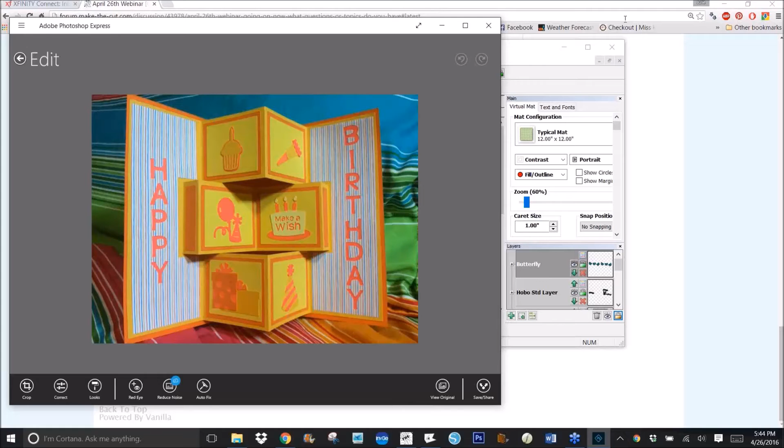Well, I saw this card. I really liked it this week, and when I saw it, I thought, oh, that's perfect for Pop-Up Card Studio. So I thought I'd show you how to do it. It's a quick, simple thing.

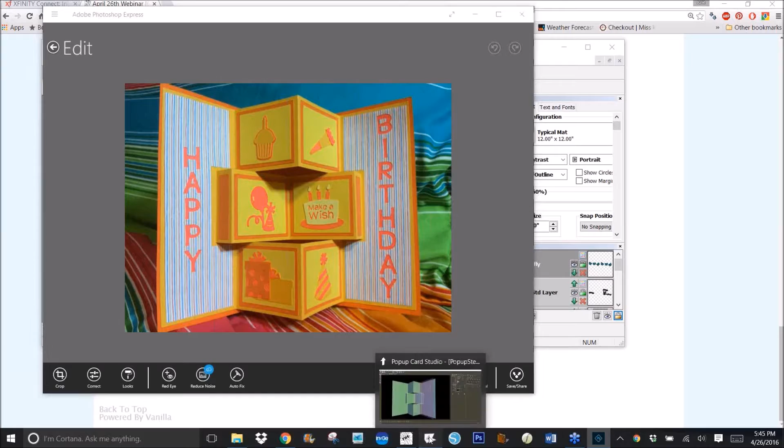It could be used as here. It's a happy birthday card, but it could also be used for any occasion. It could be a Mother's Day card, a graduate, special awards, or a thank you card for teachers, or whatever. And so I'm going to go to Pop-Up Card Studio and show you what it looks like there, and then I will go ahead and reconstruct this.

So I'm going to click on New in Pop-Up Card Studio, and I'm making the width of this 6 inches and the height 5 inches. So this is the width, 6 and 5 up. It will take a full 10-inch wide card to finish the project, but we enter in the dimensions of the face of the card in Pop-Up Card Studio.

So the first thing I want to do is add some squares. To find the squares, I click on the heart on the library, which opens, and then polygons, and I'll double click on square. Now I have to decide where I want it, because the default position is at 1 inch, and I know I don't want it at 1 inch.

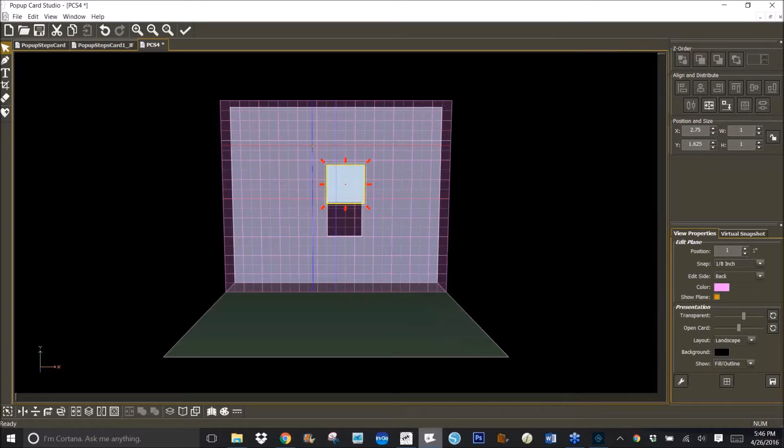So what I'm going to do is use Control X to cut that, and then I'm going to move this plane out to about 2 inches. I need this where it belongs. I'm going to put 2 inches in position. So that brings the plane out 2 inches from the back of the card.

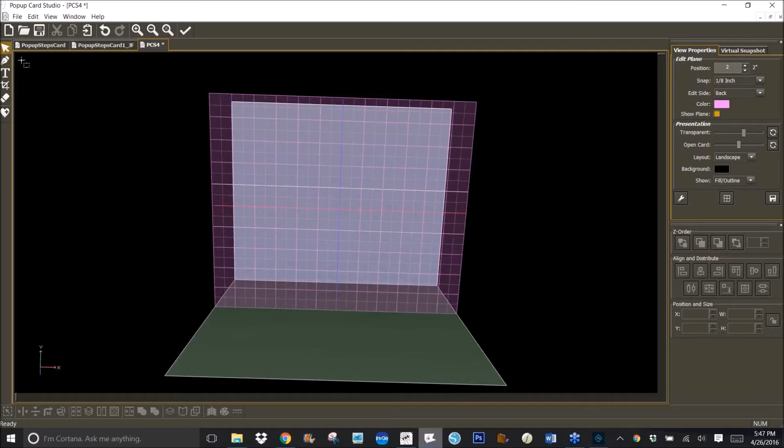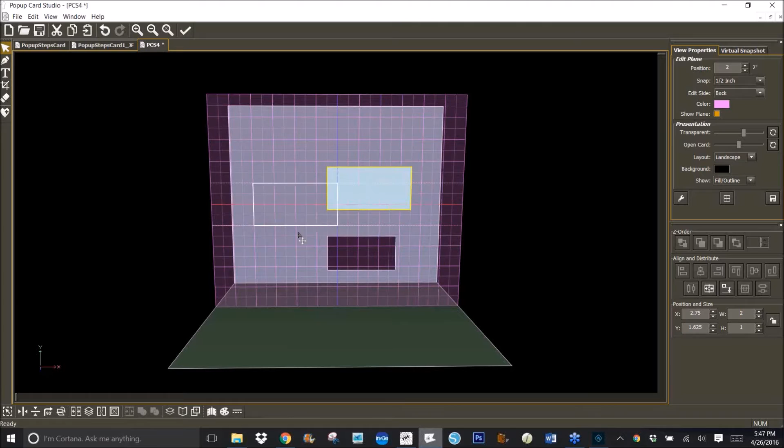And then I'm going to use Control V, after I click the arrow, Control V, to add that square back on. And I would like the snapping to be at 1/2 inch for this card. That'll help me place everything accurately. I want to resize that square to 2 inches wide, so type 2 and press Enter. And for the height, I want this to fold back, and I want the block to be 2 inches. So that means I need to make the height 4 inches.

And then press Enter. So I'm going to push it up here, and then use this down arrow to push it firmly against the bottom of the card. And I need another one just like it, so I use Control Shift and drag, and just drag off another. I'll move it up and push it down just to make sure that it's firm on the bottom.

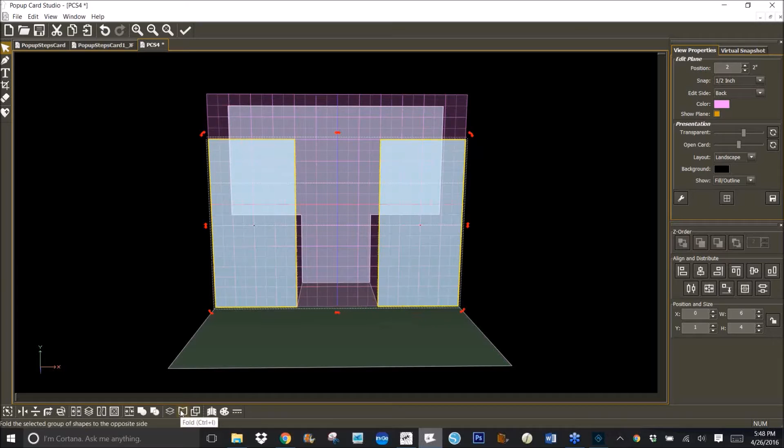Now the one that goes in the middle is shorter, but it's out 1/2 inch. So what I want to do is copy this one, Control C, copy, and before I leave this plane, I'm going to hold Shift and select both of these and click on this fold icon, or Control plus I, to fold them back. What that did was it folded them back to the back of the card. So that's what we have.

We really only have 3 pieces, well, 4 pieces to this card, so we've got half of it done already. Everybody should try this, because it is a lot of fun to play with, and I love pop-up cards because they have a wow factor.

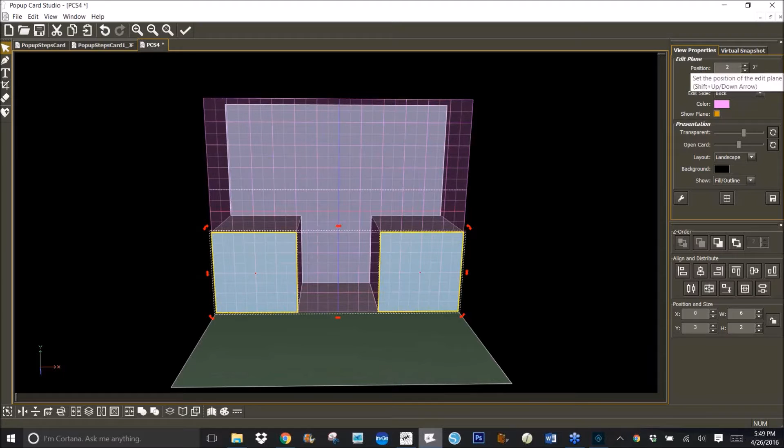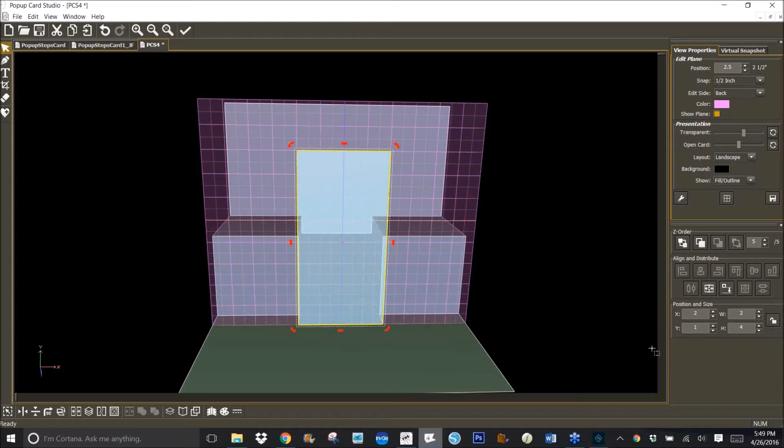For the next one, I need to have a position of 2.5. I'm going to move it forward just a little bit, as you see here. So it's going to stick out a little bit, and I'm going to use Control V to paste that same shape in, but I don't need it to be 4 inches tall. It's going to go back 2.5 inches, and then it has a leg here of 1/2 inch, so I need it to be 3 inches tall.

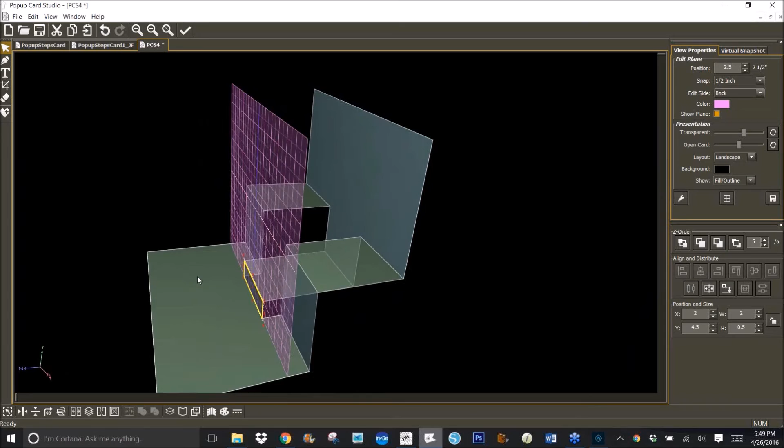Press Enter, and we'll slide it down to the bottom, and then we'll fold it back. And we want it to go all the way back and accept. So let's look and see how it is now. And we only have one more piece to add, but it's going to be added on the other side of the card. So to get there, I press the space bar.

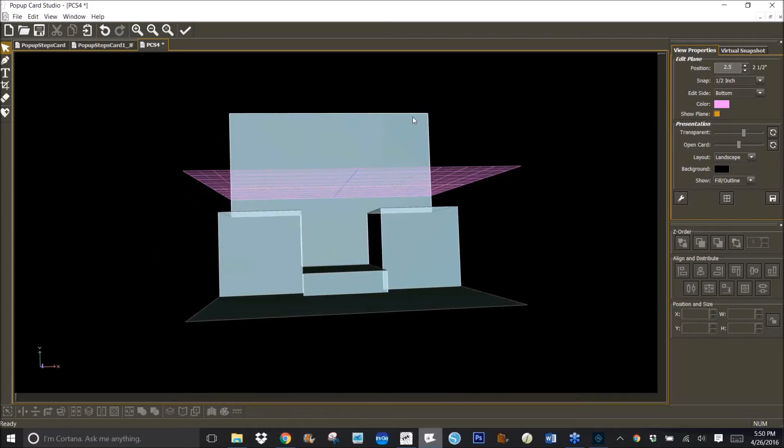And I'm going to put this up at a 2.5, I believe. Yeah. So that it's a 1/2 inch higher than these boxes. And I'm going to again use Control plus V and move it to the center. I'm going to pull it forward and then use that arrow to take it down to the bottom of the card.

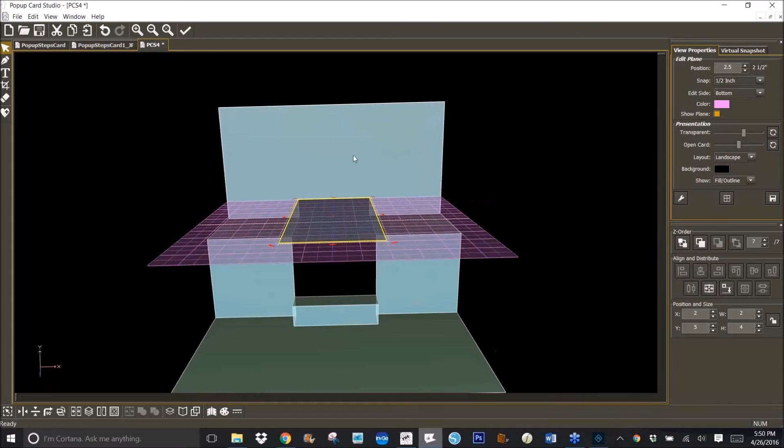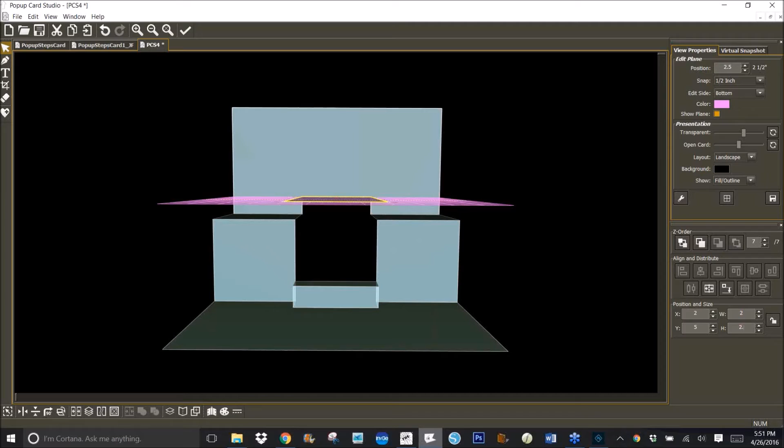And right now it's 4 inches high. I don't need it to be 4 inches high. I need it to go down just to meet this platform here. And I think that's 2.5. We'll check it out. Oops. I want the width 2 and I want the height 2.5, I think. Press Enter. So you see that piece there.

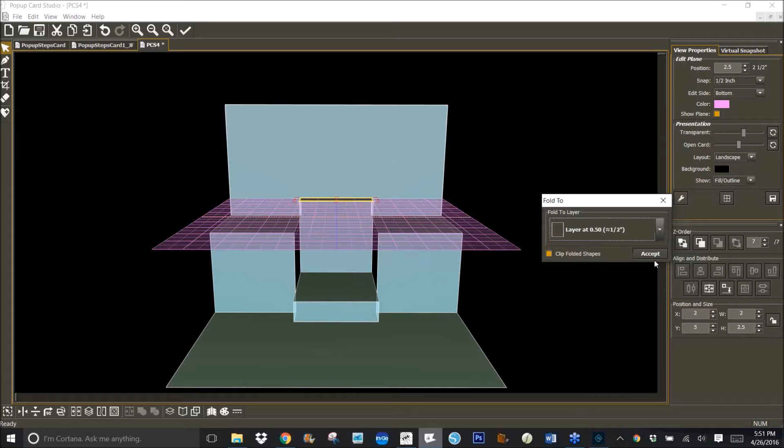And now I'm going to fold it back and have it go down to the layer. Let's see if we've got it.

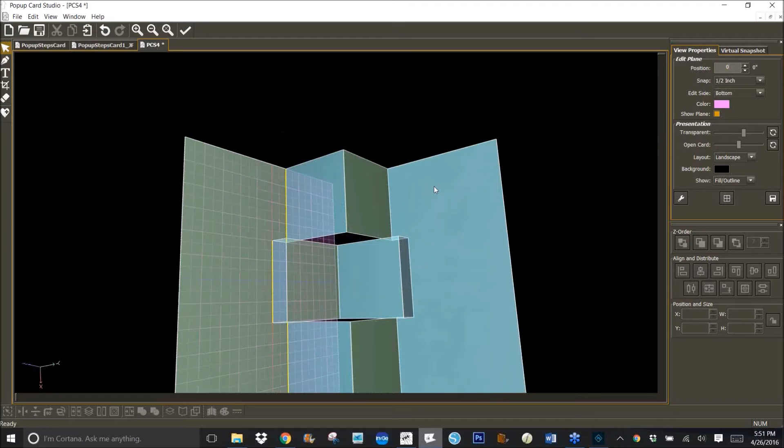So looking at the card sideways, we can put the grid on the bottom so we can see easier, of the card the way we want it to look.

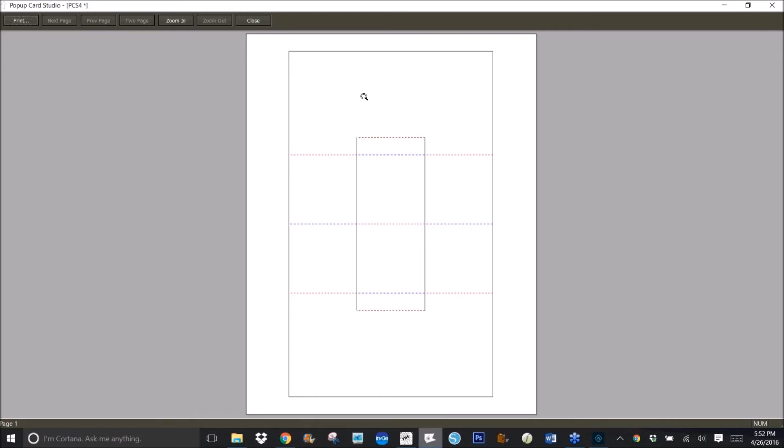Now I'm going to go to print preview just to make sure all the lines are connected the way they should be. So we have red and blue lines for all the valleys and mountains, and I don't see any problem with that.

So I think we're ready to save this. Now I don't have any idea what they would call this kind of card. Does anybody know? But it's a pop-up card, and you can make it however you want.

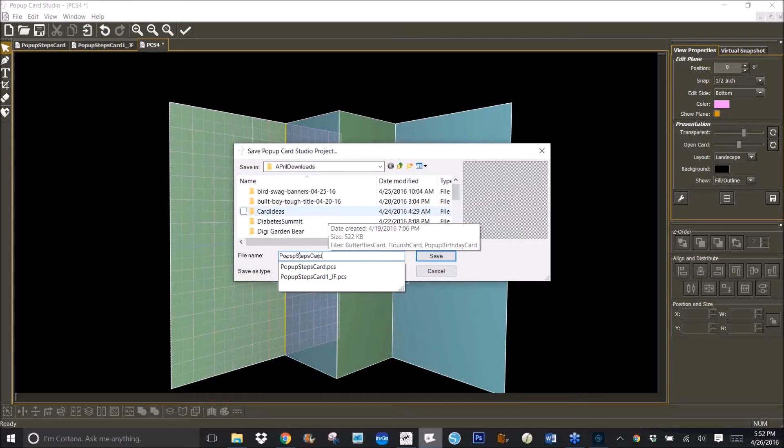So I'm going to go to File and Save As and just call it Pop-Up Steps. I just called it Pop-Up Steps card. Put my initials on it, and we can look at a virtual snapshot of it. Click on Preview, and it'll give us a picture of what it'll look like when it's cut out.

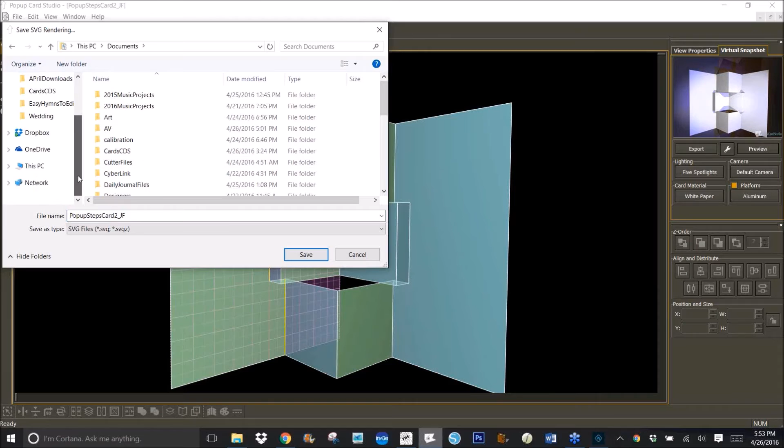Looks pretty good. So the next thing I do is go to File, Export, Project Rendering as SVG, or to the machine. If I'm going to cut to my Zing or my Gazelle or my Cameo, I would send it to the machine here. Otherwise, I send it to SVG, and it'll just save with the same name. Let me see, where do I want to save it? I'll put it on my desktop so I can find it easy.

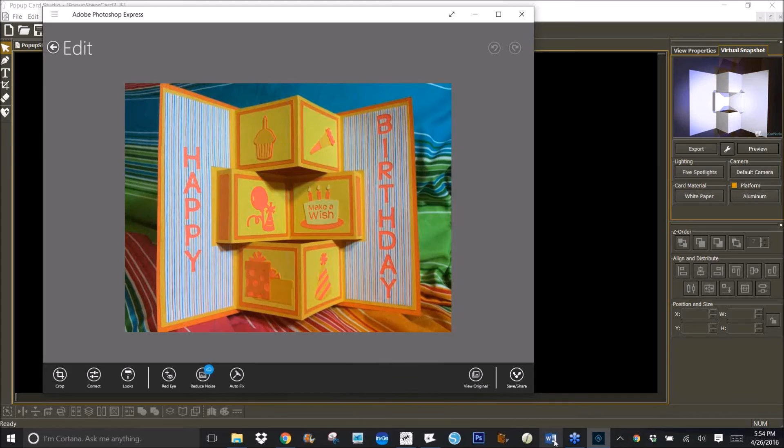Now the other thing that we'll notice in the pictures here is that they had a bunch of layers on each of the pieces. So we can export the layers and work with those in Make the Cut or in other software that it goes to. So to get those, we go to File, Export, and Project Shapes.

And I'll save the project shapes as SVG, and it'll give it the same name, but add the word shapes to it. So we know that we can find it.

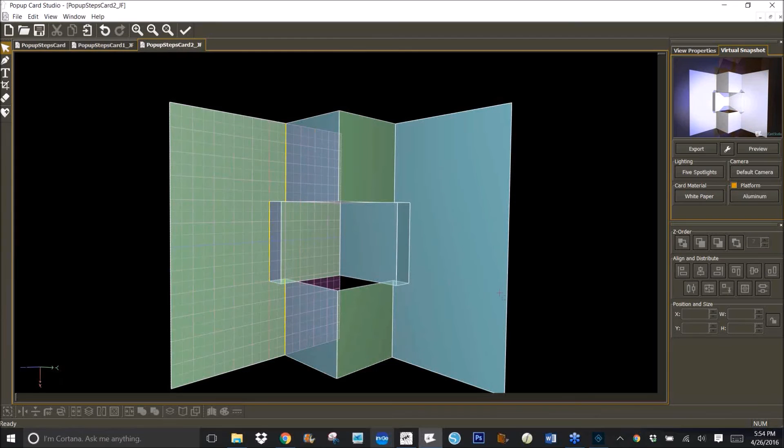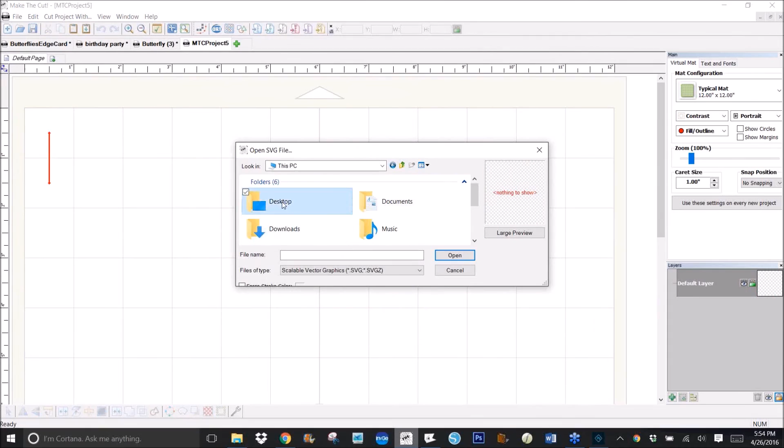Now if I go to Make the Cut and open a new page, we can click on the SVG icon and go to my desktop to find the card and the shapes. This is the card. So double click to bring that in.

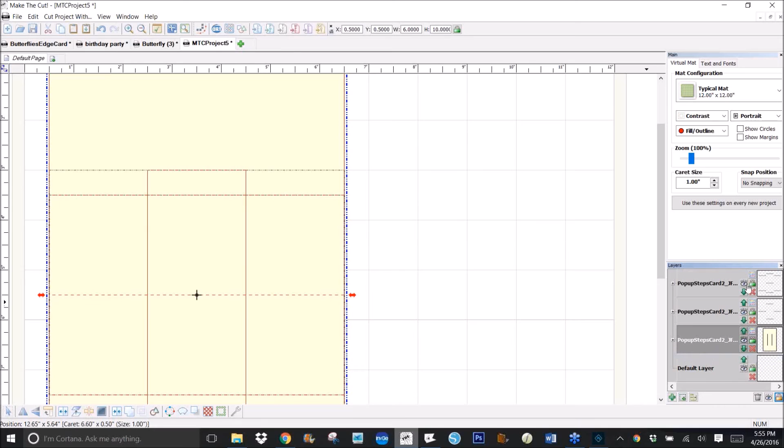And I'll change the color a little bit so we can see the lines. So that's the basic card, and it's set to have dashes. If you want to put them on their own layers, you right click on the layer and select to each its own, and that puts all the score lines on a different layer. So if we hide the card, we see the score lines.

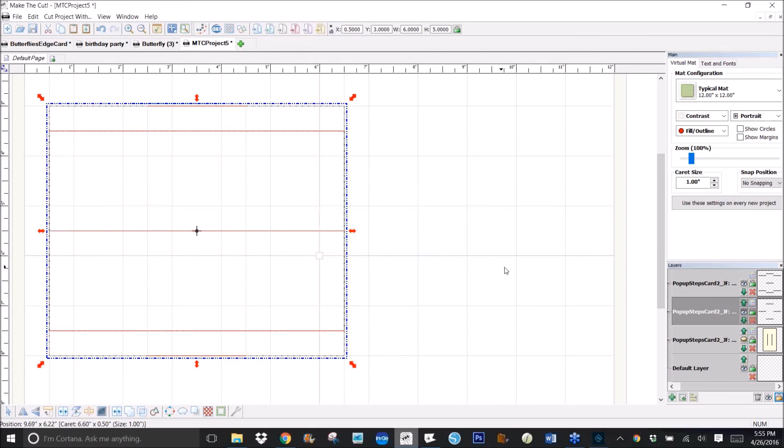Now if you would rather use an engraving tool like I like to use, then you would go click on the color box on these scoreline layers and check line style, and right now they're dashed. I would say no dashes, and I would do the same thing to the other ones and make them no dashes. So then we have solid lines for the score line.

So you could do it either way. If you want the dashes, create a new line style. I like to give mine a little more spacing. But on pop-up cards, those score lines for me tend to weaken the junctions. This doesn't have a lot of detail, so it'll be okay.

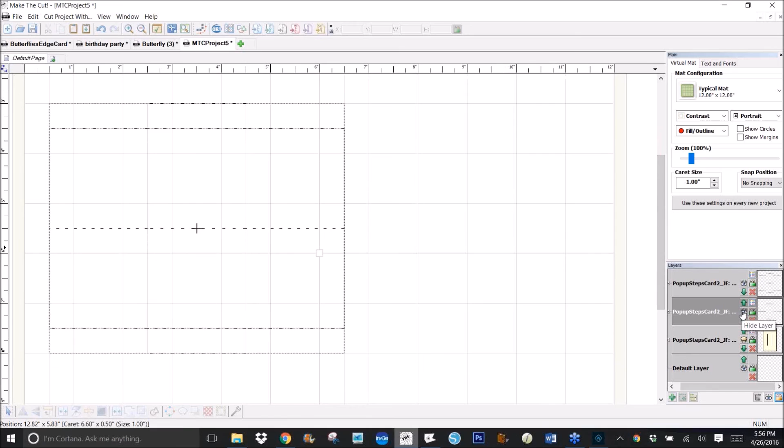So while I'm working on the card, I can hide those score lines, and I might even want to put all the score lines on the same layer, but for now they'll work fine.

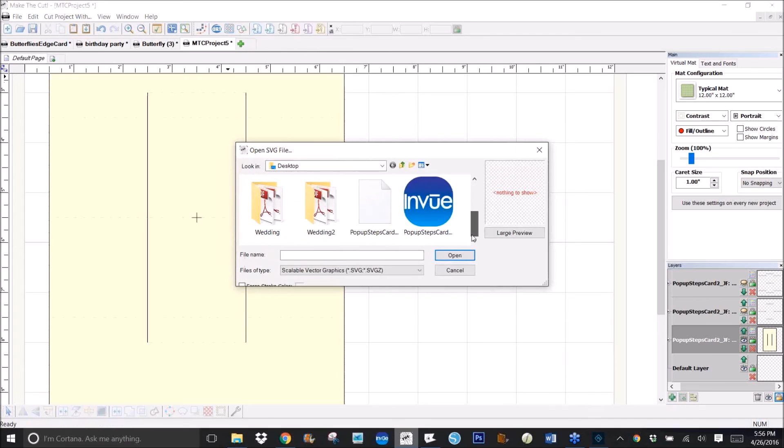Now to get the pieces in, the layers, I would click on SVG again and go to my desktop and look for the shapes. So I bring those in. We have different shapes, and all these shapes can go to the different places on the card, but you'll notice that they're perfect fits.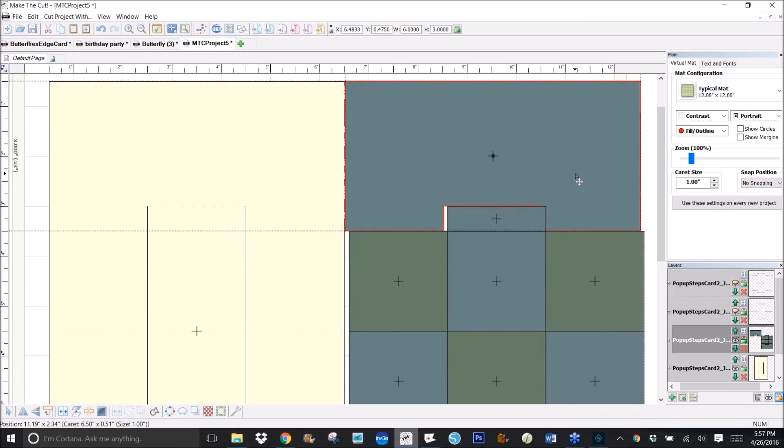And what we really need to do is do a shadow layer, because we can make an outside card for this simply by clicking on it and clicking shadow, and say we want the shadow maybe to be 0.08 and welded.

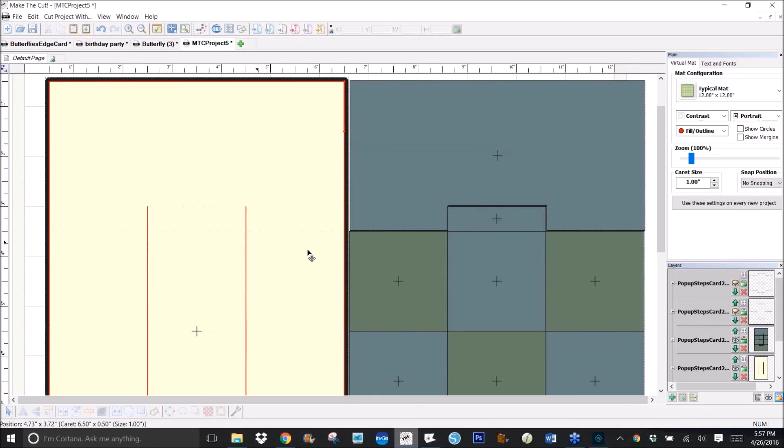And now we have a card backing that can be another color. So maybe I would make that, oh, let's say purple. And so I have a backing and I have the main card, and now I have all these pieces. And the card that I saw, I think the reason I liked it so well is because it had all of those nice contrasting layers.

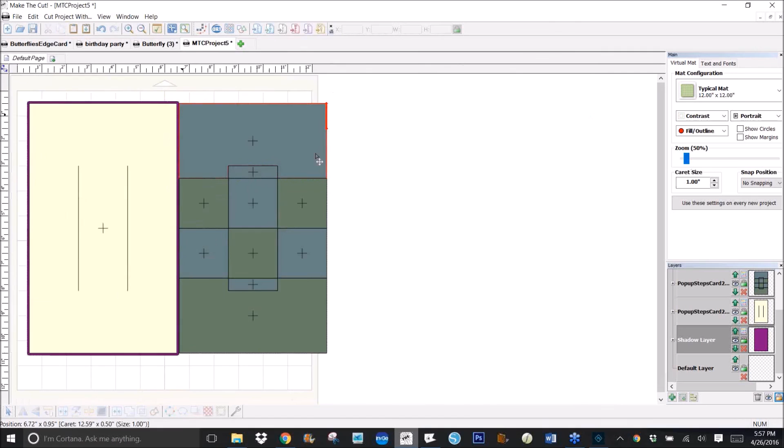If I select all of these and I click on the shadow layer, I can make these inset shadows by typing in minus point, and maybe my inset would be 08 also. You can kind of get an idea here what it would look like, and then click on accept.